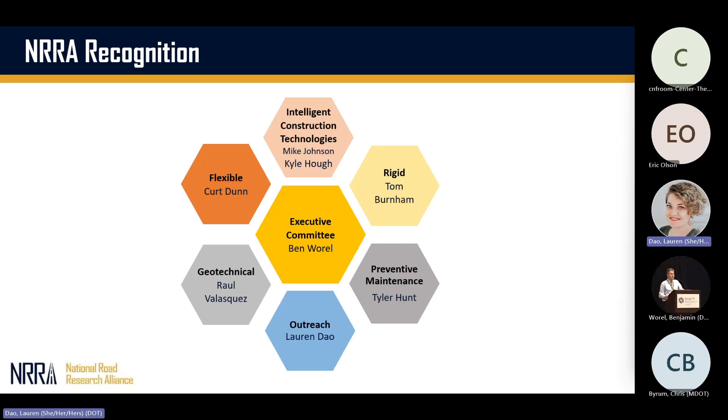With that, I'd like to transition to the 2026 Jerry Rohrbach Award. Jerry was a prominent figure at MnDOT who held a number of positions, including Director of the MnDOT Office of Materials and Road Research, Pavement Design, and others. He was influential both professionally and personally with those he came in contact with, including many in this room.

John Garrity was voted on by his peers, and there's a lot of information in your conference handout that goes into detail about John. I'm not going to go through all that, I'm going to try and hit on a few highlights.

John really helped make bituminous what it is today in Minnesota. He's guided the state DOT through a number of important changes, including the implementation of SuperPave, bituminous ride specifications, the quality management or QC/QA process we now use, and many other changes. John is a trusted and recognized expert both within MnDOT and the broader asphalt community. Not only is he a talented engineer, those who know him say he brings a lot of humor into the workplace. John is also a personal friend of mine who's helped guide and shape me, and many others in the department. So John, if you could please come up to accept your award.

Okay, thanks Mark, and good morning everybody. First of all, I'd like to thank everyone for voting this year. I'm humbled and honored and very happy to be a Jerry Rohrbach recipient. I actually had the opportunity to work for Jerry when he was both pavement design engineer and director of the building, the Maplewood Lab, where I currently work. Jerry gave me one piece of advice that I try to follow throughout my career: do the best you can and have a lot of fun. That's what I've been trying to do for the last 37 years. So thank you again, I'm honored for the award.

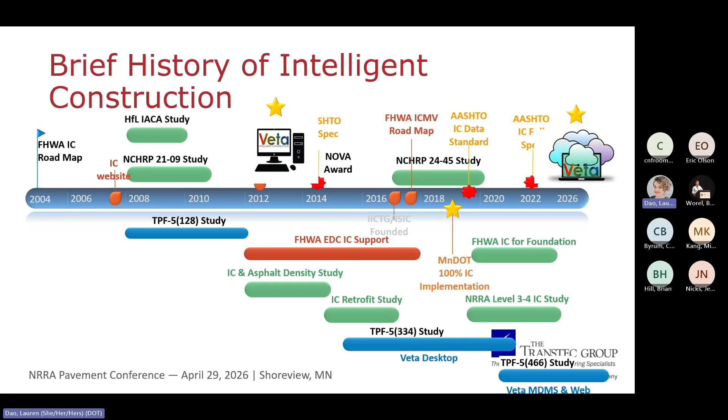So the journey started with intelligent compaction, later evolving to jointly leverage other intelligent construction technology, such as PMTP, paver mounted thermal profiling, to detect potential thermal segregation behind the screed or paver, and DPS, the dielectric profiling system, which was taken on by another pool fund study.

Later on, Minda, or Rebecca, led the development of the AASHTO standard MDMS, material delivery management system, which expanded e-ticketing to the whole nine yards - from loading and delivery events, to the entire agency acceptance on all that. So that closes the loop for the entire construction workflow, from where the material is produced, delivered, dumped, paved, compacted, and accepted.

So those technologies - IC, PMTP, DPS, and MDMS - all comply with the AASHTO standard, which helps not only Minnesota lead the nation in implementing these technologies, but also helps all other 49 states implement it by following the national standard. So that's the journey and what the principal vision is all about.

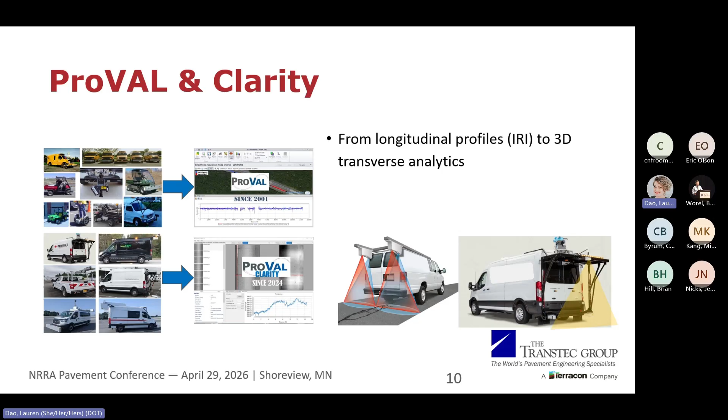This so-called Clarity is another software to standardize 3D surface data, which also follows AASHTO standard, to enable all 50 states to implement any 3D technology in a standardized way, and also to perform quality assurance by viewing and validating the data. So that's the purpose of Clarity.

Here's the brief history of pavement profiling, tracing all the way back to the 1950s when we started with the rolling straight edge, then later a response system for measuring pavement smoothness, and later the so-called inertial profiling system, which is the high-speed version used today. Since 2000-2010, the technology started to evolve into 3D surface measurement, and eventually this technology may all converge.

ProVAL, in this case, emerged in 2000, and was supported and sponsored by a pooled fund study, which I'm going to talk about tonight at the RPUG conference. So that's a 26-year journey to help the nation and all 50 states standardize profile viewing, analysis, and reporting, and implement the IRI standard-based standard, the International Roughness Index standard, by converting from the old profilograph index base to the IRI.

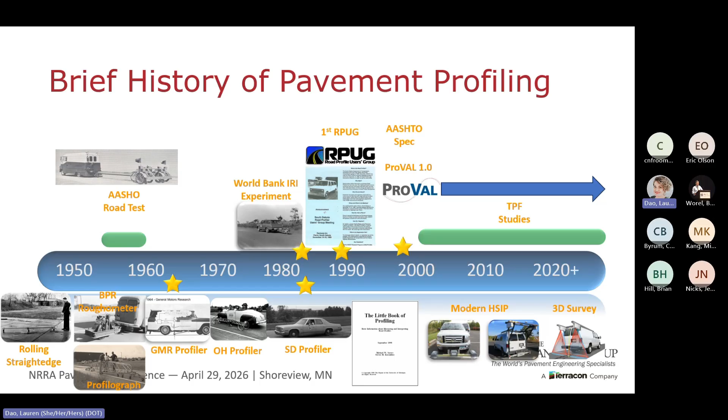So the nation can have a standardized way to evaluate smoothness and report it to the Federal Highway HPMS system with a standard and robust reporting system. This ProVAL platform, as I said, is a standard platform for any profiling system to import data into. So it can do this - it's a global tool.

It's R56. That's what we're going to talk about a lot at the RPUG conference in the next few days in Pittsburgh, Pennsylvania - to ensure all profiling systems and their operators are properly certified before they can collect reliable, robust, and correct data for pavement construction acceptance. So that's what our AASHTO R56 certification is all about.

R56 has now evolved to our so-called stop-and-go and low speed profiling system that can reliably collect smoothness data, even on low speed sections of highway, city areas, or any places that may have stop and go due to traffic lights or railroad crossings.

Those are the ones that have been evolving from federal highway research, and again the Veta and ProVAL software has been free because it's been standardized and sponsored by the pool fund study, always complying with the AASHTO standard. So it's not only for standardization for construction acceptance, but also for state DOTs' quality assurance for any state that allows contractors to collect pavement smoothness data.

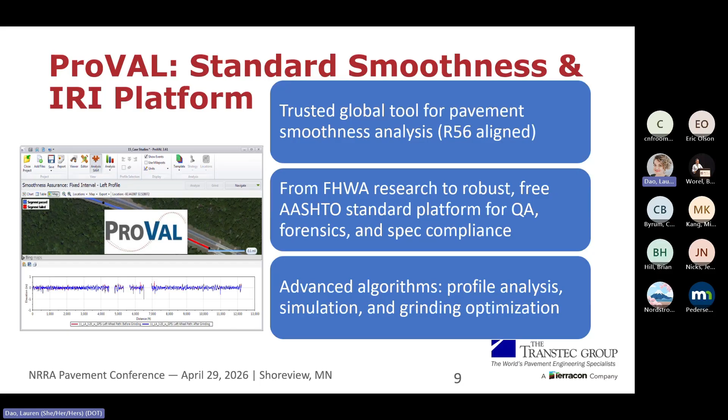Like I said, everything I've been doing over my career complies with the AASHTO standard and also the ASTM standard. I'm involved in the ASTM E17 committee to standardize as much as possible for pavement smoothness and data format, as well as weigh-in-motion, faulting, and certification modules - those are kind of a mirror and counterpart of the AASHTO standard.

I've been working very closely with AASHTO as well as the ASTM standard to make sure they're all compatible and in line with each other. So for those who don't know, AASHTO standards serve all 50 states, while ASTM, called ASTM International Standard, serves not only the US but also the rest of the world.

So we're serving and helping the world implement those technologies also. I started with 2D pavement smoothness in year 2000.

In the past decade, the technology has evolved to using a 3D LiDAR system to scan the entire pavement surface to gather the correct current pavement surface data and use those high quality data. These data are not simply color or images; they include intensity data, which shows the surface like a black and white photo, as well as elevation data. Combining these two is the current high-speed 2D, 3D surface data being collected by those technologies, notably pathway or pavement systems around the country.

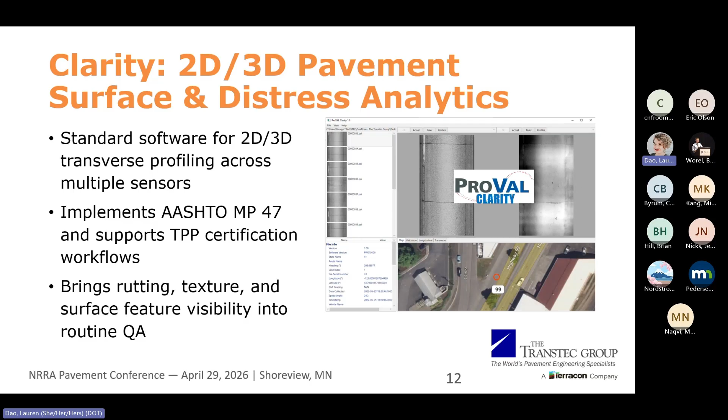Just like the similar need to standardize pavement smoothness, now the clarity software, a pool fund study that the districts pool fund helped us develop, standardizes such a tool so it can be viewed and analyzed, making it easier for DOTs to implement around the country. This can validate the data and also bring in rutting, surface, and cracking standards in the future. Currently it only does rutting, but in the future it can be used by DOTs to verify contractors' data collection for rutting and cracking.

So switching to ISIC. People always ask, what is ISIC? It's the International Society for Intelligent Construction. This has been thought for years, but in 2016, one of the co-founders, Dr. Soheil Nazarian, and I co-founded it. Now we have 500 something members, and we conduct a conference every two years, along with a lot of workshops and webinars.

This International Society for Intelligent Construction creates a global platform for all experts, producers, and users of intelligent construction technology to share experience, technology, hurdles, and solutions for any subdomain technologies such as sensing technology, data analysis including data standardization, decision making, and highway asset cycles.

We've also produced and written, busy writing over weekends and nighttime, a lot of textbooks for university or agency training programs to train the current generation and future workforce to handle and manage intelligent construction technology.

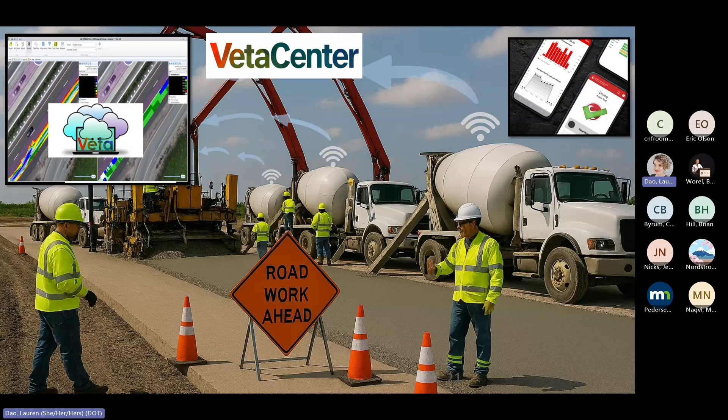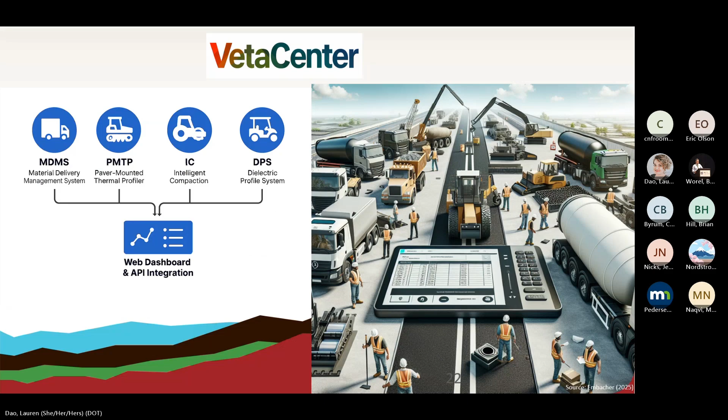So those are the standards we're going to do, and here's the VetaCenter that will include everything, merging and fusing all the data together from the entire paving train. The desktop version, in several months, will all be on the web. That's the full module I mentioned about.

Hope y'all can attend our ISIC North American Conference in Louisville from August 24 to 26, so we can talk more about intelligent construction technology. So this is my brief journey of 30 years of smoothness and intelligent construction. Thank you so much.

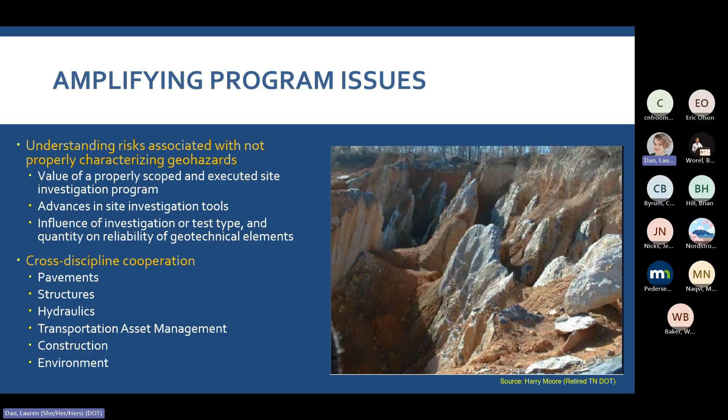So when everything is said and done, for the last several years we've had 5 major pots where we have been sort of assigning money for research purposes, for development purposes. Innovations in geotechnical design and construction methods is just that - it is the evolution of construction means and methods and the size of elements, and our ability to try and govern all of these new construction means and methods and innovative construction means and methods.

Advanced site characterization points back to that whole geohazard issue, and doing a better and more reliable job of understanding the input parameters to design, so that we can do a better job of delivering projects.

Asset management and performance management - that really looks at our ability to understand long-term in-service performance of geotechnical assets, including pavement subgrades, which is nearly impossible because you can't see them or touch them. So how do we know, for instance, if we are doing something below ground and then covering up with pavement for 75 years, how we're getting performance out of that long term? We really don't. We're looking for ways to try and better understand that.

Geotechnics of scour - Jennifer Nicks has been working on some really impressive work lately, looking at scour and clays. We are trying to get some stuff published. I'll talk about a couple slides, but it's very, very impressive work.

And then finally, our geotechnical aspects of pavements - understanding that pavements are our single largest asset in a DOT, and the fact that we really have been disconnected as a geotechnical program from our pavements program. We have been working with the pavements group and some external partners to see if we can't do a better job of integrating with our pavements group, to look at such things as permanent foundations under pavements as a concept.

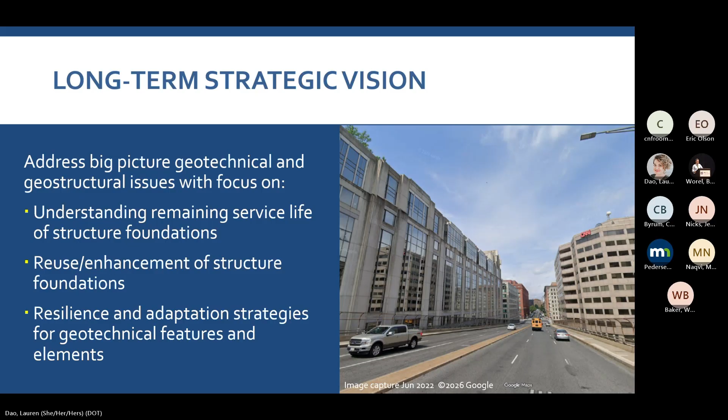So, I'll start with a couple of things that we are currently working on, with that as sort of the background.

One of the first things we are working on actually started about 15 years ago, when we started to write an update to our GEC 5 document, Geotechnical Engineering Circular 5, on soil and rock properties. We ended up titling the new document Site Characterization. The idea was pretty simple: if we look at geotechnical design across the board, we generally accept the fact that we are going to have changes in just about everything except soil and rock properties.

But a code doesn't really acknowledge that. A code just gives you a minimum standard of care—do a boring here, take a couple samples, move on. And we don't really address uncertainty in the site characterization process very well.

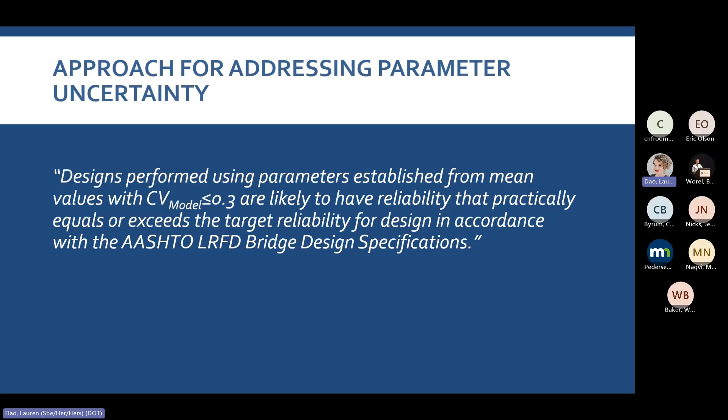Okay, so with that, the way the code is going to look in the future, hopefully if we can get this through Charlotte in June, is that instead of there being a Section 10.5 where we had all these resistance factors just sort of tucked into tables, we've now moved all of the resistance factors to match the design elements that you're working on. So if you go to 10.6, which is the shallow foundations design section, the resistance factors specific to shallow foundations are all going to be in 10.6 now, not there. And 10.7 will be driven piles, 10.8 will be drilled shafts, 10.9 will be micropiles.

The model will give you something called a critical design parameter, the parameter that is most sensitive to its effectiveness. So if you're looking at a drilled shaft side friction design, the critical design parameter would be shear strength of the clay. That would be the parameter we are looking at the coefficient of variation for. This does not absolve you from being diligent about all of the other parameters, it just looks at the critical design parameter.

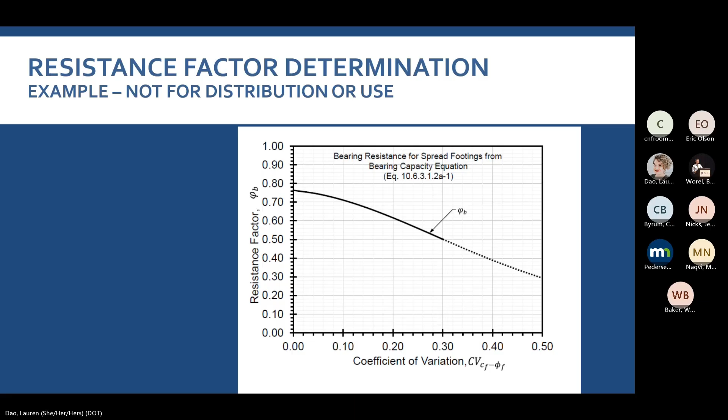The second big picture item we are getting involved in hasn't started yet. It should have started in January. We are still waiting on some final pieces of paperwork to start. But we have been given an opportunity by Texas A&M University to go down and deconstruct one of their national geotechnical experimentation sites. So let me back up.

Back in the early 1980s, the Federal Highway Administration partnered with the National Science Foundation to fund a series of characterized outdoor laboratories around the country. We built six initially as Tier 1 facilities, meaning they were extremely well characterized. The idea was that once the labs were built and developed, we could allow geotechnical contractors, engineers, and researchers to go out and use the sites for experimentation of any kind. The most famous one was Treasure Island out in San Francisco, it no longer exists, it was taken out and now there are condos on it. But we had Tier 1 sites at Texas A&M, the University of Massachusetts, and Northwestern University. I think the one at Auburn University still exists.

But they are getting ready to do some construction on one of the sites at Texas A&M, and they called us up and asked if we would be interested in coming down and helping them decommission the site. To us, decommissioning meant a lot. It meant that for a site that was initially characterized back in the mid to late 80s, in the 84 to 88 range...

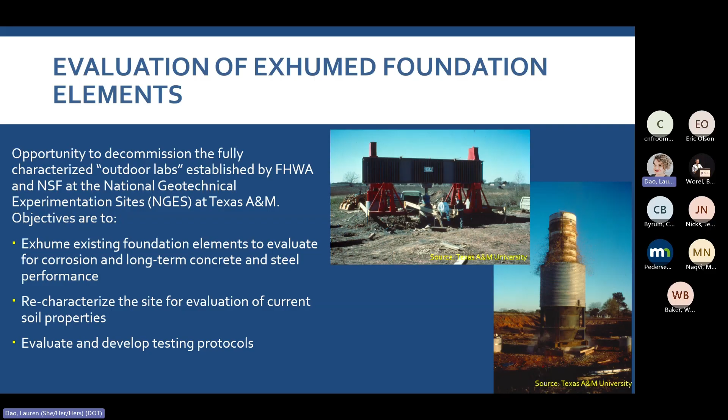We have a long-standing project that's been going on for several years, looking at the evaluation of geotechnical limit states for structural foundations. The idea is that as elements get bigger, they become harder to design and understand. We work in a big strain, load deformation arena—you put load on it, it deforms, and we pick some arbitrary location and call that nominal resistance. In a 12-inch diameter element, that's fine, but in a 12-foot diameter element, that's a lot of movement that can't be tolerated, which gets us back to whether geotechnical strength limit state belongs to the geotechnical engineers or not. We're still looking at a lot of different things there, but I think so far we're understanding a lot more than I thought we would.

We are looking at quality assurance procedures for large diameter drilled shafts. The evolution of rotators and oscillators has made it impossible for us to understand some things—I want to point out that's three pieces of technology that have interrupted this presentation already. Rotators and oscillators have made our understanding of quality assurance and acceptance in drilled shafts very, very difficult of late, so we're looking at some changes there.

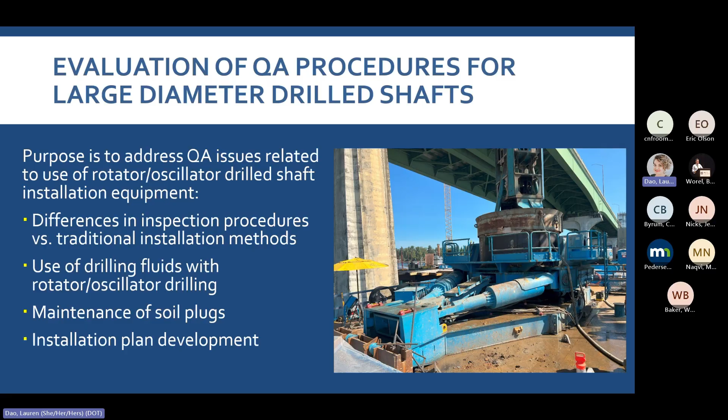I mentioned Jennifer Nicks earlier. She's working on some approaches for looking at allowable critical shear stress in clays. That essentially looks at part of our research strategy for NextScour, which is a better understanding of the geotechnical aspects of scour. She's doing some really interesting and impressive work there. We have some papers in draft, so state DOT people who want an advance copy, just call us and tell us you want to review it and we'll send you a copy. Jennifer's listening, and I hope it's okay with her.

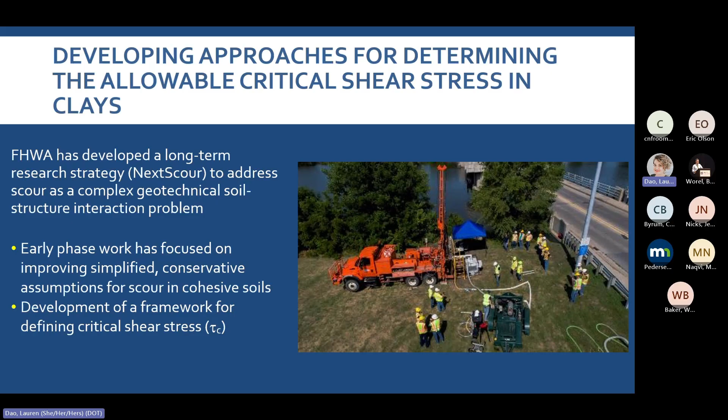We have a broad agency announcement, a big research effort in liquefaction hazard assessment going on right now, with the UCLA Next Generation Liquefaction Group. We're working with them on models that we hope will improve understanding of liquefaction triggering, liquefaction susceptibility, and liquefaction manifestation—which is something I don't quite understand, but they tell me that even if it doesn't manifest, you can still tell it liquefied. Fine. We'll see how that goes in the future, but we're a few tests into that.

There are just a few additional activities going on. I won't go into real detail, but we've got some external projects, including one Tom Yu is working on, a demonstration project for long life pavement foundation systems. That's a pooled fund that's just getting underway, so find him at lunch and pick his brain about what's going on with that.

We've also got some contract former postdoc employees at Turner Fairbank working on roughness measurement devices for gravel roads—think IRI pavements, but for gravel roads. It's called the RTK GPS cart, a testing device mounted on a golf cart. So a bunch of things like that are going on, and some other things we've got on a wish list to look at in the near future.

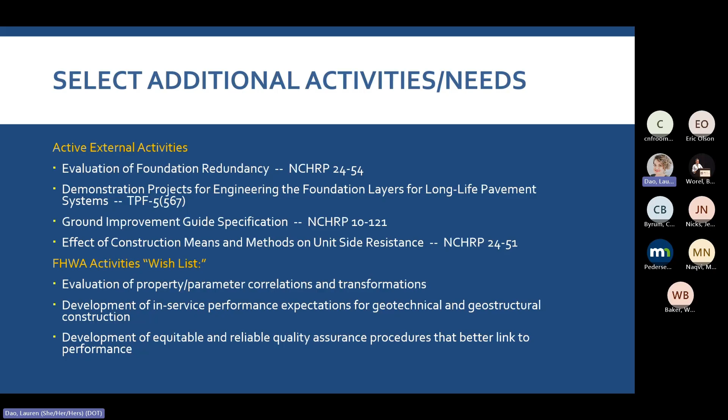The last thing I'll mention is that we're going to be doing a lot more work through NHI for communication. We're going to continue to develop, assess, write, and document, but we won't have the resources to really run around the country and do the things we used to do before, which means we'll have to find different ways to communicate with state DOTs and our partners. So you'll start to see a lot more work through NHI to help us communicate results and developments we're doing both in-house and overseeing externally.

And I hope that in the near future that will find its way to be practical and efficient for the way that states continue to deliver projects. So with that, I'll say thank you.

That's the I-95 bridge in Philadelphia that burned down a couple of years ago, which we rebuilt geotechnically until they could come in with a structural solution. We were able to get the bridge back open in 3 weeks by using foam glass aggregate fills that ran 24 hours a day through all kinds of weather until we got it paved, put a wall facing on it, and reopened it to traffic. Then 6 or 8 weeks later, they finally started getting pieces in for the bridge, and they rebuilt the bridges around it. So, thank you.

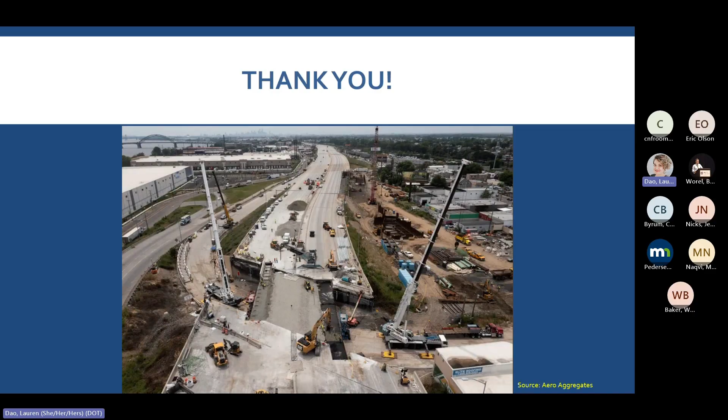So, Professor Ali from Auburn graciously came to present this. Sorry, you're only going to have 15 minutes, hopefully you can get to the point and deliver the main topics. Their students drove 20 hours from Auburn to bring these sensors that we're going to be installing across Minnesota to test this technology. So anyway, I'm going to stop talking, let Ali talk about the technology, and hopefully you guys get excited about InSAR. That's fine, I'm going to actually go walk.

Hi everyone, thank you so much for having me and my students. We came here to present a topic, as Raul mentioned, on the use of satellite imaging and InSAR to measure ground deformation, mainly for geotechnical asset management. I'm here with my students - I flew for 2 hours 30 minutes to get here, my students drove for 20 hours, so we all know the suffering they had before, right? So there's professors.

This is the team involved in this research. It's a collaborative work between Auburn University and Texas A&M University. We have me, Dr. Kupala, and then Dr. Montgomery. We also have a collaborator in the UK, University of Exeter, Dr. Matsuri, with background in InSAR and remote sensing. I also have my students with me today, Najib, Zahra, and Vadova - they are the brain and muscle behind this work. They're going to have some posters today, so in case you have any follow-up questions regarding this topic, reach out to them and ask questions.

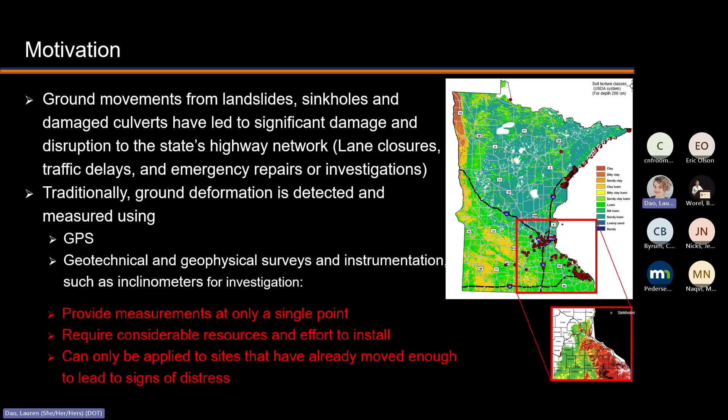Traditionally, monitoring these types of deformations is done through surveying, instrumentation, and similar technologies, which provide very good, accurate data. However, they come with limitations. First of all, they provide measurements at very focused locations. They are time consuming, the installations need a lot of manpower, and require considerable resources and effort. The main issue is that you can use them only in locations that have already shown some sort of damage or distress. Here we propose an alternative approach.

That's the use of satellite imaging, especially interferometric synthetic aperture radar, known as InSAR, that provides better spatial coverage, almost global scale, and also has very short revisit periods. This means it will provide us near continuous monitoring of geotechnical assets.

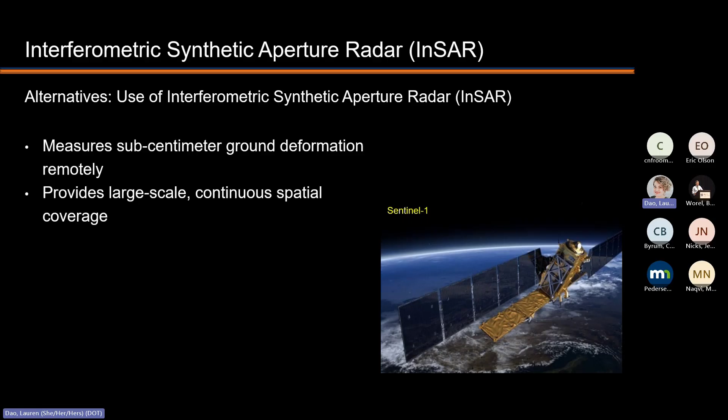But exactly how this InSAR technique works - here you can see a constellation of two satellites, mainly for one of the systems known as Sentinel-1. We have two satellites orbiting the ground along near-polar orbits, and each satellite has a 12-day revisit period, with two satellites bringing it down to 6 days. It means every location on Earth is going to be visited by the satellite every 6 days. If you think about it, that's very short, so this provides us with near continuous monitoring of the deformation.

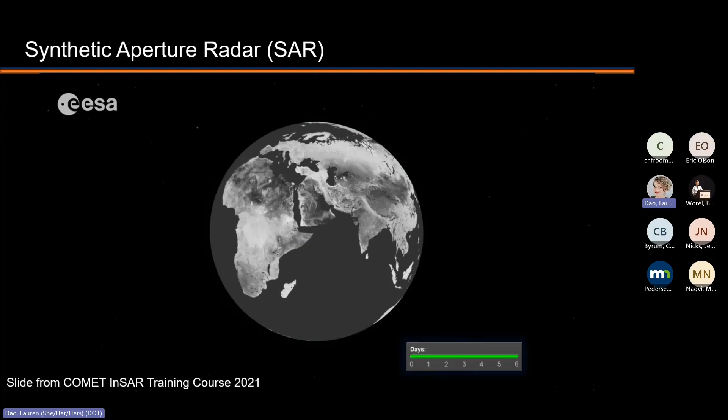There's always some confusion about what SAR and InSAR are. While these satellites were reading the Earth, they take images, reading south to north, but looking sideways. The image we get from these satellites is what we call a SAR image. It's 1D, and it usually happens along the direction of the look of the satellite. That's what we call LOS, or line of sight.

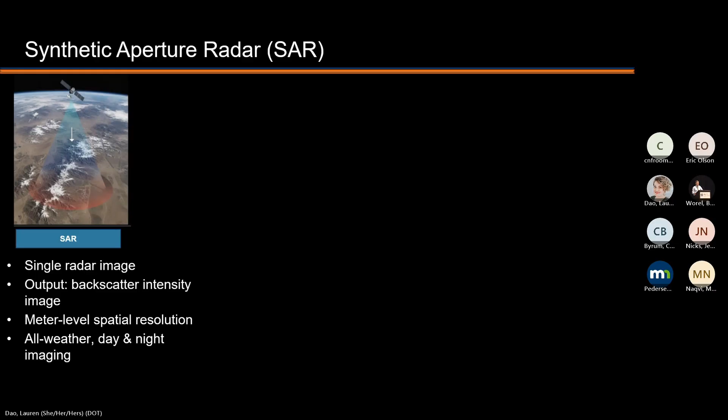These images at the beginning look like a normal image, but it's more complicated than that, providing you more information. It's like a complex number. It has two parts: a real part, which we call amplitude, and an imaginary part, which we call phase. Amplitude is pretty much like a normal image or aerial photograph that you see.

But phase is like some random pixels with different colors. Each color, when brightest, means better quality; when it's faded, it's low quality. When we go to the wavelength domain, amplitude is pretty much the length, the height of the wave. Phase is almost where we are in this wavelength, and the value changes from 0 to 2 pi.

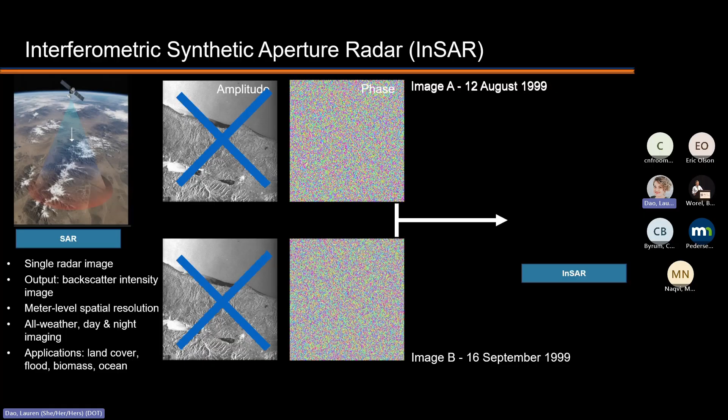Imagine we have image A from some period of time, and image B taken some days after - say 35 to 36 days after the first image. If we ignore amplitude and just focus on phase, we can subtract the phase from image A and image B and come up with a new image that we call an interferogram. That interferogram is what provides us with the deformation pattern in the region.

This process - taking images, getting to the interferogram - is what we call interferometric SAR, or InSAR. So that's the difference: in general, when we talk about SAR, it's mainly the image, the data we get. When we talk about InSAR, it's the process, the technology, the technique that gets us to the interferogram.

This cartoon shows the whole process in a simpler way. Imagine we have these satellites. They have SAR sensors, which are pretty much like microwave sensors. They send waves to the ground and receive the backscatter.

With that, we know the length of the wave, but how many of these waves we have, we don't know, because the distance is long but we still need many of them. It's like having a ruler that has multiple ticks - we know what the distance is, but we don't know how many of them we have.

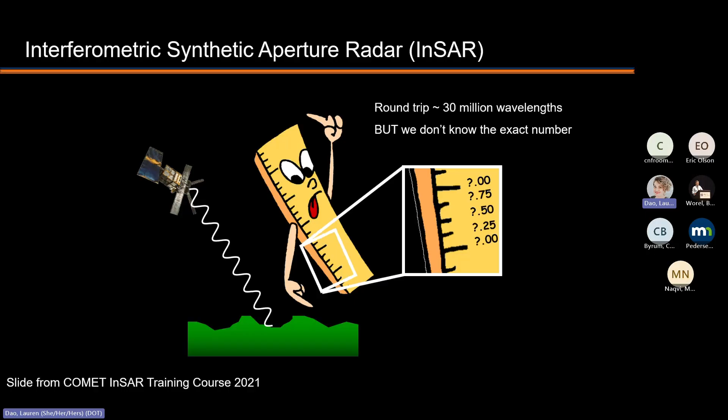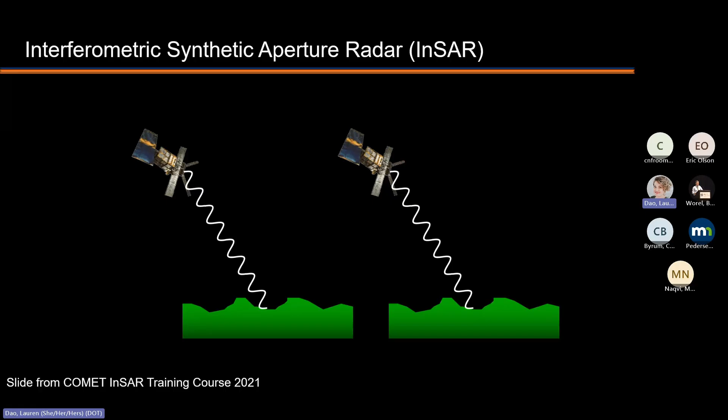Think about this satellite taking one wave at a certain time, then coming back later and taking another wave, getting some scattered data from that wave. We start comparing these two wavelengths together. If the satellite visit shows no difference in the wavelengths from the first and second image, it means the ground hasn't moved at all. But if you see a difference, that difference results from some sort of deformation in the ground. So it's pretty much like that.

We have it due to topography, due to atmospheric effects, and then we have some noise in the region. So at the end, we have the phase difference due to deformation.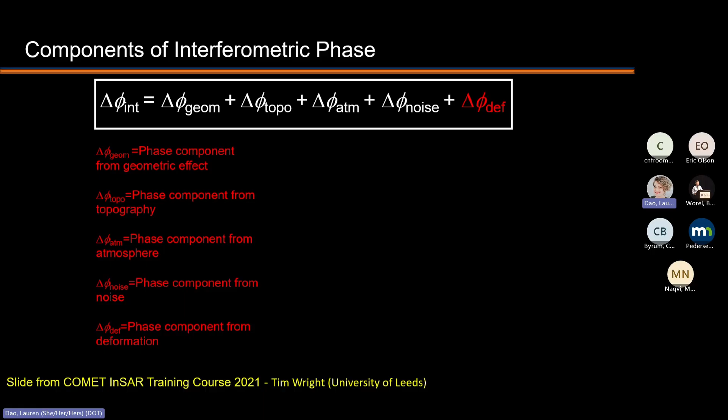When we have these satellites, they usually look at the Earth from 2 different angles. As I said, they usually move south to north. But the satellite, for example for Sentinel-1, when it goes from south to north, we call that an ascending path. And when it does that, the look of the satellite - the LOS, let's call it - is going to be toward east.

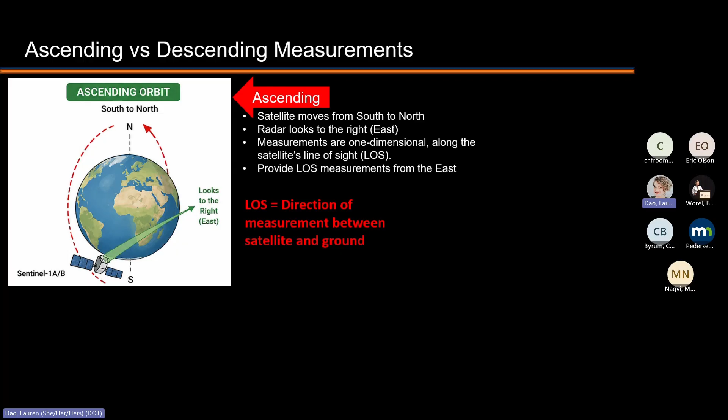When it goes from north to south, it's what we call descending. During this pass, LOS is going to be toward west. So overall we have 2 measurements. They are not horizontal, not vertical - they are along the look of the satellite, or LOS. From this image, you can see one for ascending, one for descending. With these two, some simple math gives us what we need: vertical and horizontal deformations.

There are different types of SAR satellites that you can use, and they come with different frequency ranges. We have mainly X-band, C-band, and L-band, and the difference is in the wavelengths they send. X-band has the shortest wavelengths.

X-band senses small objects, but is highly affected by vegetation, as you can see in the figure. As we go to L-band, it has the longest wavelengths, and the penetration depth is very good - it passes through vegetation with minimum effect. Then we have C-band, which is in between, providing a good measurement but still affected by some vegetation.

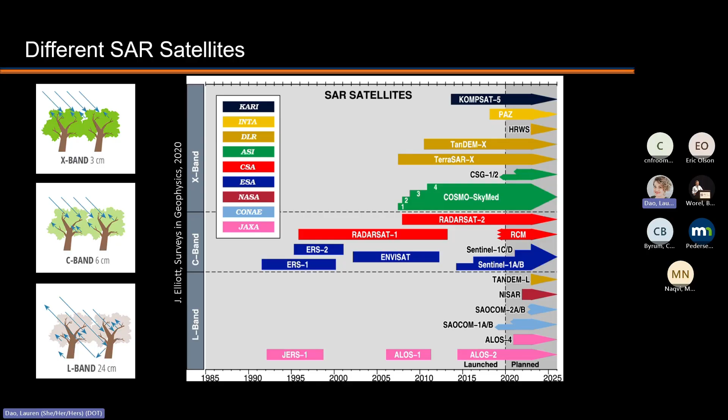Like Sentinel-1 or NISAR. When you have higher resolution satellites, it provides more spatial details, but you sacrifice spatial coverage. With lower resolution, you get better spatial coverage but sacrifice spatial details. So it's a trade-off between spatial coverage versus reliability, and depending on the project or application, you decide which one to go with.

The other important factor for us is how to access the data - whether it's free or commercially available. Commercially, they're very expensive; each image can cost a couple thousand dollars, depending on the satellite used.

Our focus in this study was on free access satellites. Mainly at the beginning, Sentinel-1, because it was the only satellite available in that category. They are C-band satellites with a 12-day revisit period. There are always at least 2 satellites of this type orbiting the Earth, so that gives us almost 6 days revisit time.

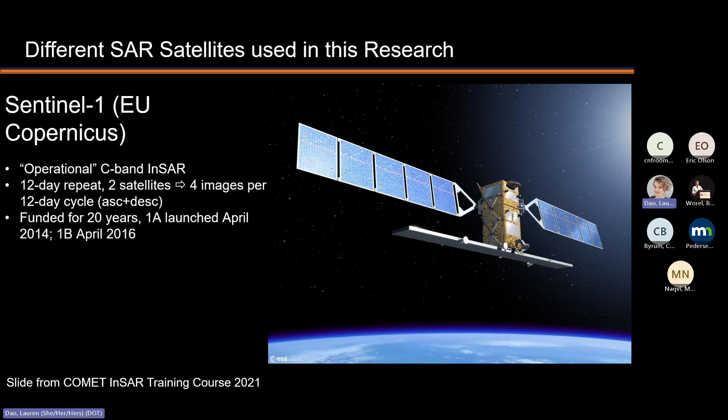Then the resolution comes, with different options - they have native resolution all the way to high or lower resolution depending on the application. We have NISAR, recently launched. It was supposed to launch 3 years ago, but for some reason they delayed it. Finally this summer they launched it.

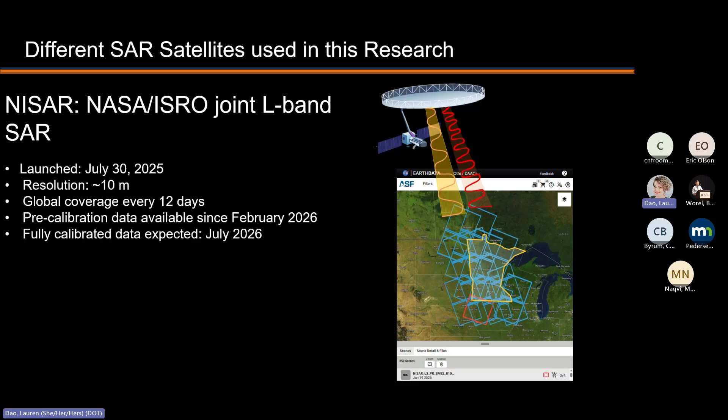NISAR has L-band, which is great for vegetated areas. It has a revisit period of about 12 to 14 days, and the resolution is about 10 meters, which is going to be great for projects related to geotechnical asset management. We were also able to secure access to ALOS data through a proposal submitted to JAXA,

the Japanese satellite system. They usually have this cycle every 5 years, in case you want to go - I think the next cycle is going to be in 2 to 3 years. They provide about 200 images. That's not enough to do continuous monitoring, but it provides us with tools for calibration and validation.

For Sentinel-1, it was the primary satellite for us for analysis. As I said, there are different types of resolution depending on what you're going to do - you can choose any of these. We have native resolution, which for each pixel is about 14 by 2 meters. We have resample, used for larger areas, since those pixels can be very small and a bit noisy. When we resample, we use more of those smaller pixels combined into one, improving the coverage.

And then finally, you can also do multi-looking, which is pretty much like averaging over multiple of these pixels. With that, you can improve accuracy for your measurements. You can see how the size of these pixels compares to the highways, for one of the highways that we did for our study.

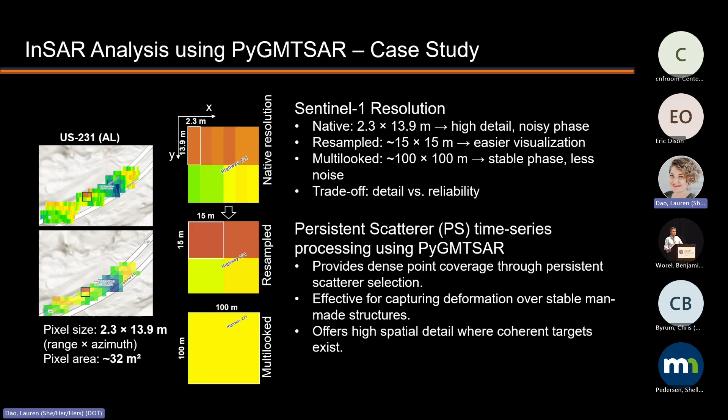There are different online or offline platforms that you can use for InSAR analysis. The one we used was a platform called PyGMTSAR, that uses PS, persistent scatterer time series analysis. I'm not going to go into detail with this one, but depending on the type you use, you're going to get different answers, different time series. So just be careful about your choice of framework or processing system for your analysis.

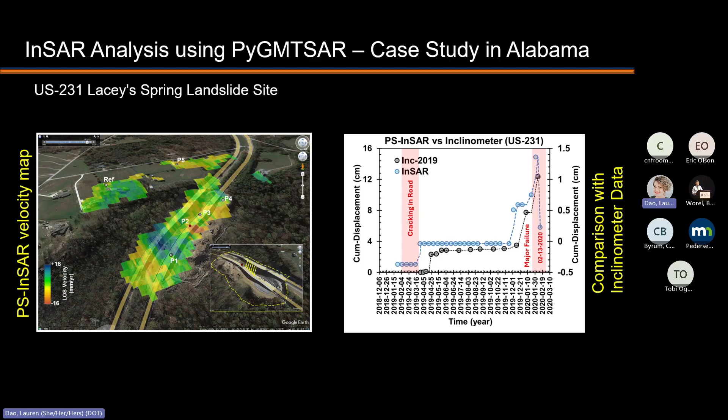We also did this for an area in Minnesota, Climax, due to some historic deformation that happened in the region. This is still preliminary data. We chose 3 locations since we had data for it: south lower, south upper, and north. This is the time series analysis we performed from 2017 to 2025.

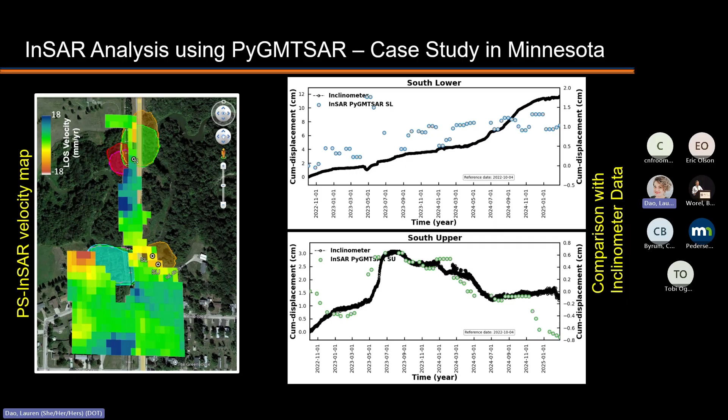Here you can see how InSAR compares with the inclinometer data in the field, this is for south lower, this is for south upper. For south lower, we were able to capture the trend, and for south upper, we were able to capture the exact trend, so this one came out better than the other. For the upper part, you can see some sort of seasonality in the measurement, which I assume needs more retuning to make sure we have proper values. But still, pattern-wise, we were able to capture the pattern observed at the site.

It still needs work because we cannot control the technology. There are many satellites already there, and new satellites going up that will improve this technology. At this point, it's like we are in robotic technology 10 years ago, when we only had hands moving like ping pong balls around. But now you saw what happened in the Chinese New Year festival, robotics doing the Jackie Chan thing at the festival.

And then, especially when you use Sentinel-1, we have some limitations because of the vegetation in certain areas, especially Minnesota and Alabama. There is huge dense vegetation, and that makes signal clarity a little bit difficult.

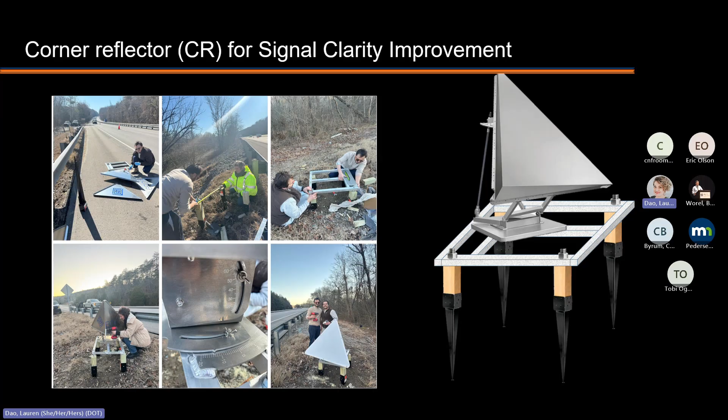How it works: imagine this is a satellite and this is the corner reflector. You just have to make sure these two look at each other properly. It's like love at first sight. When they have that, they make the connection easily and give you a proper image that can stand for a lifetime.

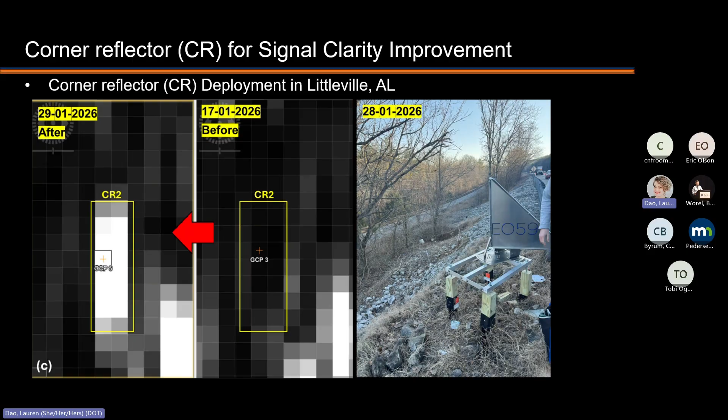Similar to many relationships. And then I would like to thank you all for having me.

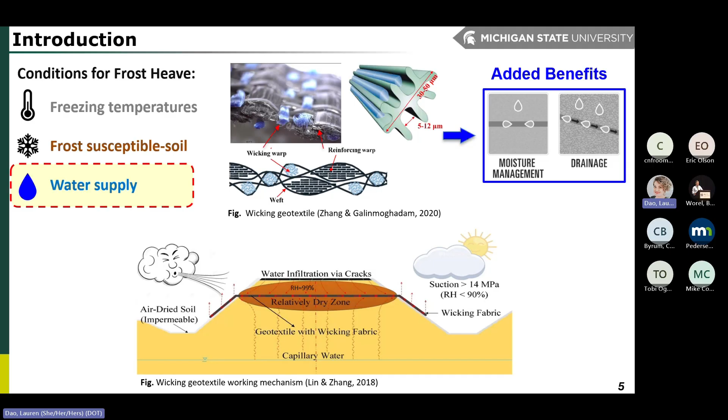It has standard properties of geotextiles, but it also adds some benefits like moisture management and drainage. These wicking warps draw water into the fabric and then pull it out toward the shoulder, providing moisture management, uniform distribution, and better efficiency in drainage.

So here's the goal. Today I'm just talking about the field part of this project. My colleagues already conducted multiple large-scale tests in our laboratories in Michigan State University, Texas A&M, and INGEOS.

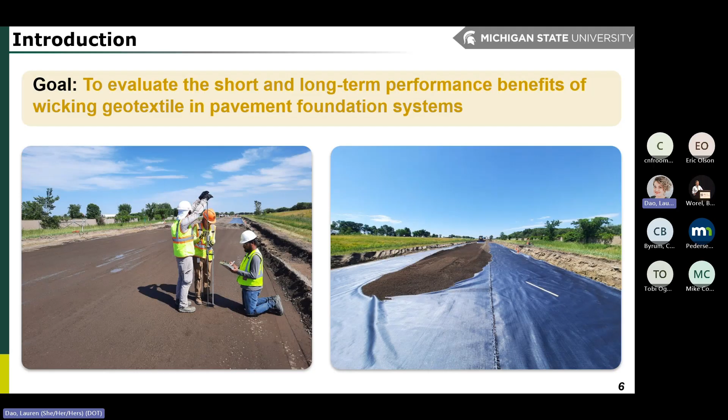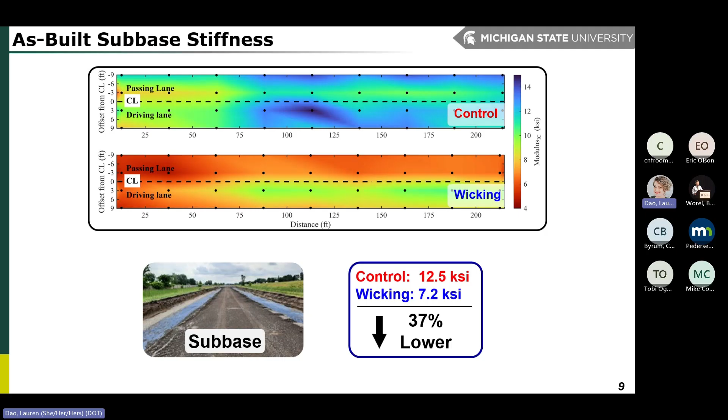After compaction, we had 37% lower stiffness in the wicking geotextile section because of some schedule constraints during construction, so we had to place the other layers on top of it. This is the intelligent compaction result for sub-base, with a similar trend for base showing 23% lower stiffness.

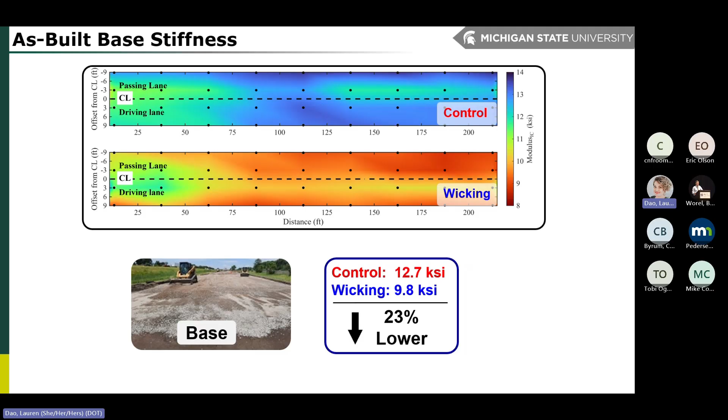So the wicking geotextile section started with lower stiffness, a disadvantage at day one, but it also gave us a chance to see the performance of this wicking geotextile under unfavorable conditions, which was a great thing for us at the end of the day.

When it comes to the monitoring results, I'd like to talk about moisture content first. I will share just two different moisture sensor results for today. The first one is from subgrade at 33 inches depth, which is 3 inches below the geotextile. This red line is for control and the blue one is for wicking geotextile.

I think everything is so clear here, the difference is super clear. During spring thaw, right after that blue-shaded freezing season, the increase in moisture in the control section is significantly higher than in the wicking geotextile section. It was drier, but at the same time it provided uniform moisture distribution throughout the section, which is really good.

There are multiple studies out there, but studies show that just a 2% increase in moisture can significantly increase permanent deformation or decrease the MR resilient modulus. So this is really critical for us.

This one is the sub-base sensor. The difference is not that significant in terms of the amplitude of the moisture content, but if you check the spikes after each rainfall, you see on this side of the slide that the control section had significant fluctuations after each rainfall, while the wicking geotextile provided uniform moisture and was even drier in some periods at the sub-base.

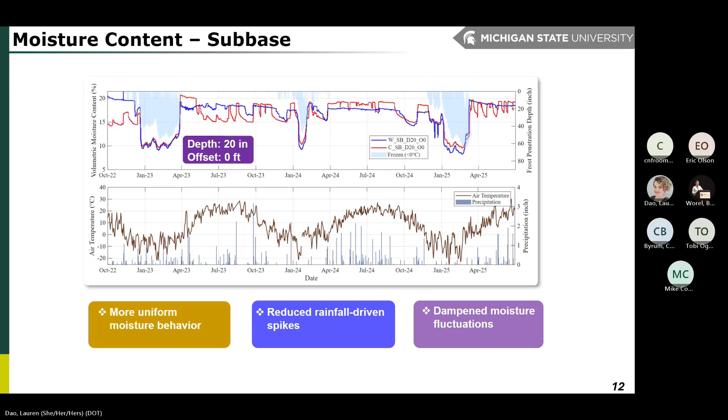So this is above the geotextile, by the way. And just one example from the displacement profile from the inner wheel path of the passing lane. This is our shape array sensor.

In this project, and actually in different projects, we're still working to understand the shape array sensors, but the existing interpretation is that we think we have frost-induced settlement because of the surcharge pressure and flexure restraint coming from the top thick pavement. So we had higher settlement in the control section near the centerline of the road.

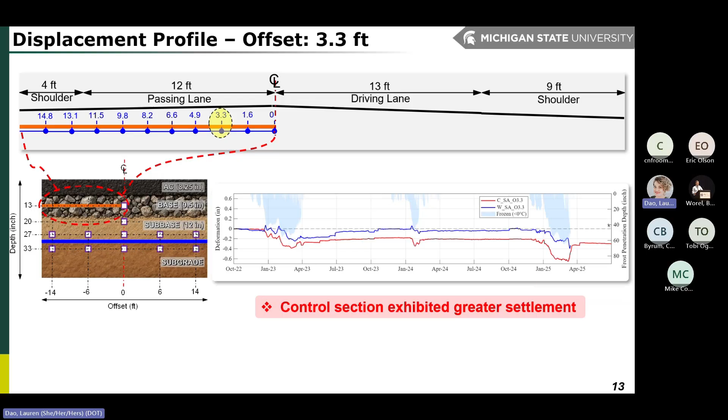And Wicking Geotextile was almost stable compared to the control section, especially in 2024 with milder winter. In addition to these sensor results, thanks to the MnROAD team, especially Jacob, he conducted multiple FWD tests in different seasons and months to see the structural performance of these test cells and understand the performance of the geotextile. We did back calculation with these test results, but back calculation has some flaws and it doesn't allow us to

do apple-to-apple comparison. That's why we wanted to go with the deflection basin parameters recommended by FHWA 2017. The first index is the base layer index, which represents the performance of the base layer, depending on the depth of the layer. We have 14 different FWD test results throughout the project period.

First of all, it provided uniformity. The coefficient of variation of the Wicking Geotextile section was 32% lower than the control. The Wicking section also had a higher BLI, which is actually bad at the beginning of the project. But right now, if you check the last test results, they're almost identical. So if you check the long-term performance of the geotextile, they are converging to each other, which is good,

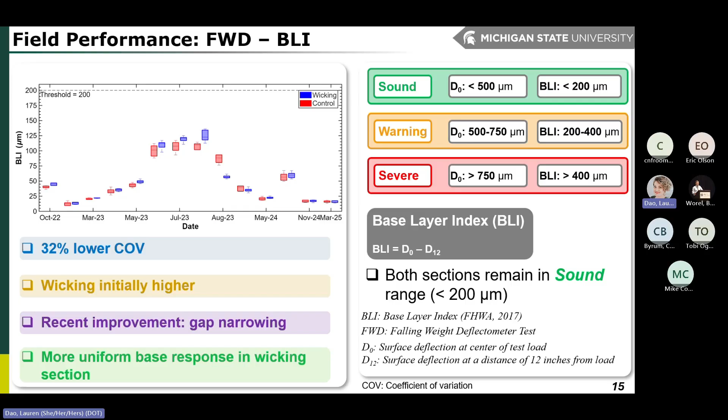but 3 years is still not what we'd identify as long-term. To see more significant benefit from the geotextile, we should observe and monitor these sites for more years. The second index is MLI, middle layer index, which represents the performance of the sub-base. The trend was similar here. The last one is the lower layer index for subgrade. The gap was narrower compared to the other ones, but we observed a similar trend.

So these are the conclusions. The first one is, as I mentioned, we initially had 12 to 45% lower stiffness across layers in the Wicking Geotextile section. But even with this disadvantage, we had effective drainage with a functional outlet.

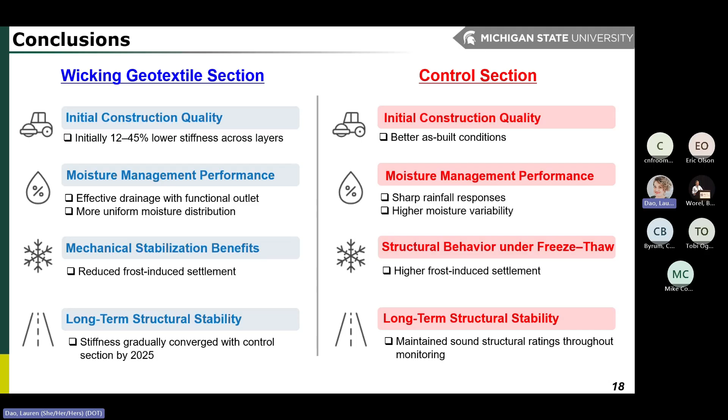I'll mention this functional outlet in the lessons learned section. We had more uniform moisture distribution, reduced frost-induced settlement, and stiffness gradually converged with the control section by 2025. But again, we should monitor these sites for more years to see more significant differences between these two sections. These are the lessons learned, three lessons learned here.

The first one is proper compaction, which is really critical for structural performance, but at the same time, for capillary continuity, we need proper compaction to have that contact between the soil and sub-base, or depending on the type of soil, and geotextile, which is really critical because if you don't have capillary continuity, unfortunately the geotextile doesn't work properly.

The second one is the functional outlet. Actually in the report it's clear, but I didn't have time to elaborate on this today. We observed some differences between the driving lane and passing lane. The pictures we had from the field showed that we had some problems with the drainage outlet at that site, which is why it didn't give us good results compared to the driving lane.

It's really critical. And the last one is quality construction and inspection at terminations. If we have a ditch design, even with the daylighting design, the main concept here is the suction gradient. That side of the geotextile, the termination, has to be drier than the inside. Otherwise, if you are on the wet side on the shoulder, unfortunately this ends up leaking water inside the system. So this is really critical.

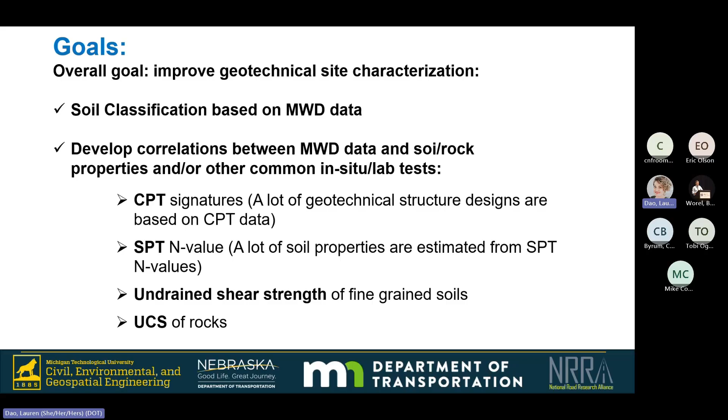After instrumentation, we collected a lot of data. We drilled 36 boreholes—26 using HSA, hollow stem auger drilling, and the other 10 using mud rotary. We collected the measurement-while-drilling data, did some in situ testing, collected samples, and ran lab tests. So now we wanted to see what we can do with this collected data.

These are the six parameters we collect for all types of drilling, with the last two only for mud rotary—these are individual parameters. Then there are equations, most physics-based but some partly empirical, that calculate properties from these individual parameters—these are compound parameters. So we have six individual parameters and many compound parameters; eight or nine of them are the most commonly used and beneficial, and we use these to develop correlations and also soil classification.

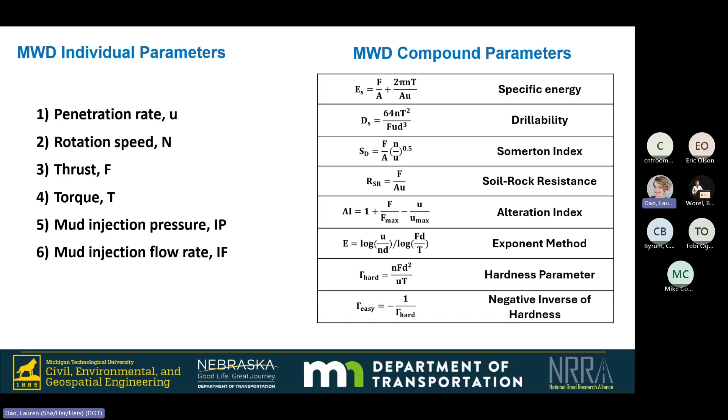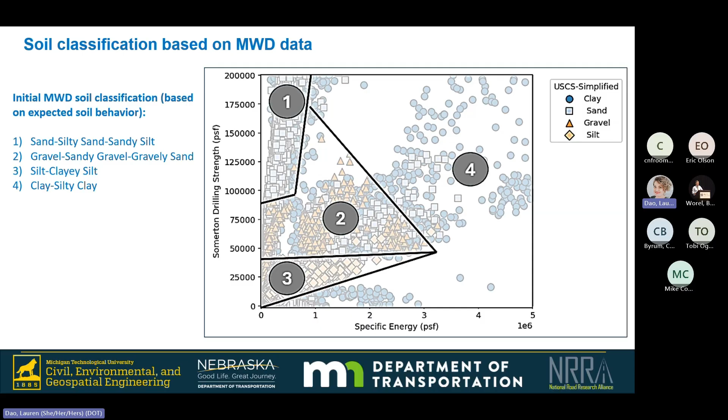Compare them, and they are in relatively good agreement. So I think it's not a final classification, but it shows that we can get somewhere with this data.

The next thing we wanted to do was compare CPT and measurement while drilling data. The first attempt was to just plot them on one plot, but the scales are so different that the measurement while drilling just becomes a line.

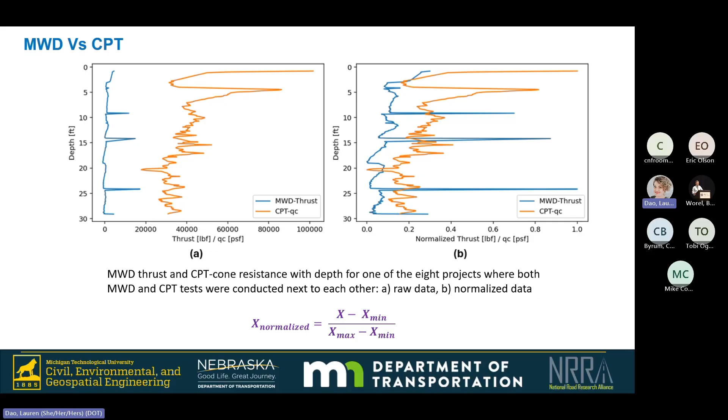We cannot compare them like that, so I normalized them based on this equation. Now we could actually compare at least the trends, to see if there's any correlation or any hope of correlation. Doing that, as you can see, there is actually really good correlation, so we should be able to predict one from the other.

So in this case, we're measuring the MWD data, and we want to predict the CPT. A lot of our data showed really nice, similar trends, which was encouraging. But then we came across some plots like this, where you can see it's all over the place.

We have 8 CPT data points with measurement while drilling right next to them, and all of those measurement while drilling runs were HSA. We realized during this project, for the first time, that there is a specific issue that occurs when you're drilling with HSA.

Sometimes when you're drilling in high plasticity clay - and it's not the traditional definition of high plasticity, if your liquid limit is above 30-ish and your plasticity index is above 15 to 20 - you'll see this phenomenon. Each one of these lines represents one flight of the auger.

At the beginning of the auger flight, the torque is normal and the thrust is normal, but as you go down with that single auger flight, the torque increases and the thrust goes down, sometimes even reaching a negative number. That tells us that something's wrong here.

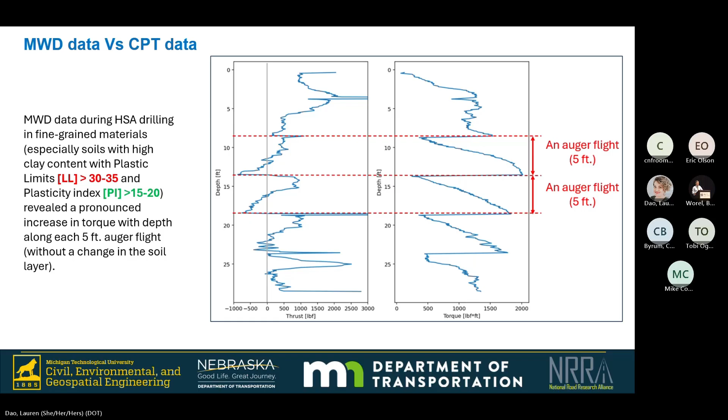So I wanted to see if we could still work with this data, because at least the first few inches of every auger flight should be fine. After that is when the auger becomes clogged and the issue happens.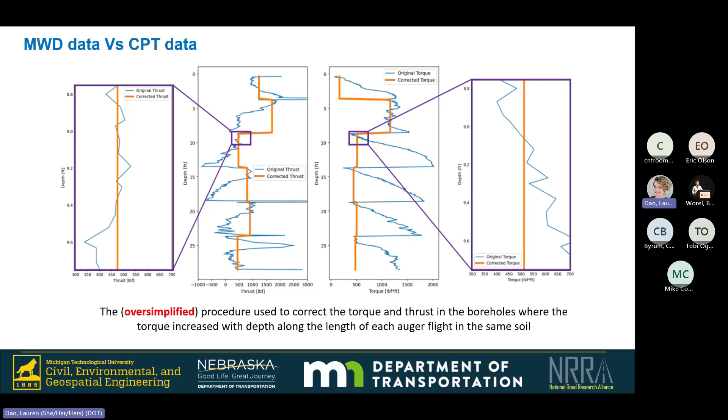So what I did was take the first half foot of each auger flight, take the average, and replace the whole section with just that average. It's not perfect - I just wanted to try this oversimplified method and see if I could find that same trend with it.

And it turns out that now, if I do that, I don't have the same problem I had before - the trends are matching a little bit better. Not perfectly, obviously, but it works pretty nicely.

But that's oversimplified, because when your torque goes up and thrust goes down, it's not just those two parameters you could fix - they're affecting everything else, the rotation speed, the penetration rate, everything.

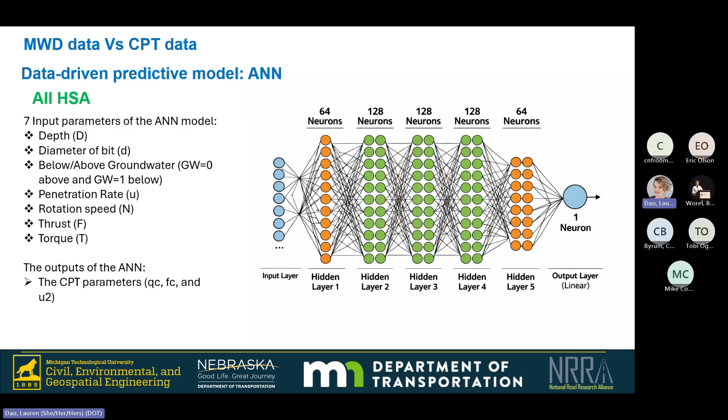So I wanted to see if I could use machine learning with all the information, plus some additional data - like whether I'm above or below the groundwater table - and see if I could get some meaningful results from this erroneous initial measurement while drilling data, so to speak.

And it turned out that I can. So I did this, then used some data that the developed model hadn't seen, tried to predict it, and then compared it to the actual data. As you can see, I could get some decent trends.

Then, with one of the boreholes we had not seen - we had the actual CPT for it - I plotted that against the CPT predicted by the machine learning model from the measurement while drilling data.

As you can see, they match very well. You obviously still have some issues - we cannot predict the negative pore pressure just yet, but we're working on that.

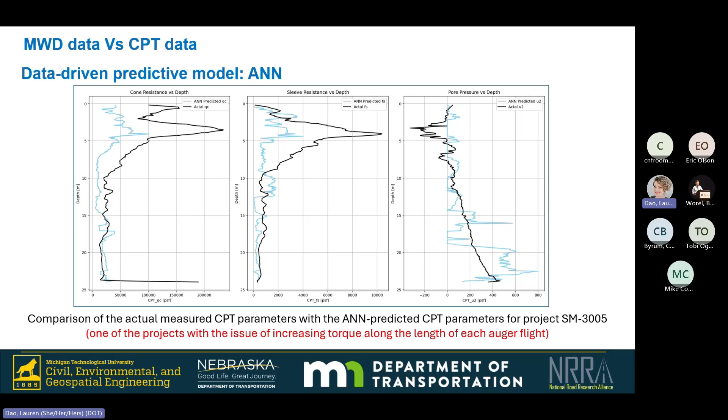So then also, as I mentioned, I use the CPT because from CPT you could classify the soil as well. I classified the soils from the CPT data, but on the same plot I developed these 4 regions.

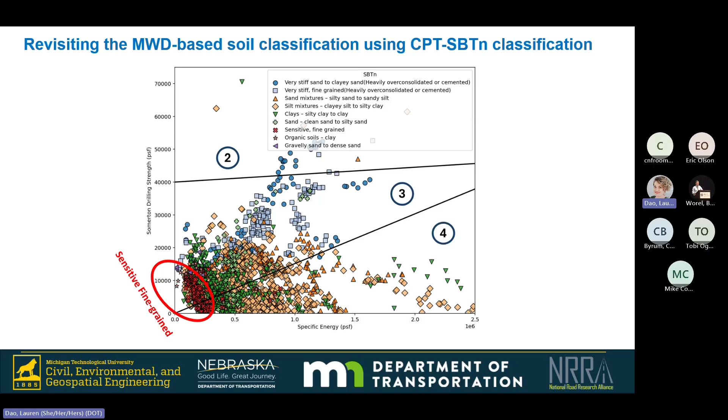Obviously it's zoomed in so I could look at it, and again there's a good correlation. There's a lot of scatter, but all of that scatter is explainable. The only thing I noticed is that little corner at the bottom of the plot, where all the soils classified as sensitive by CPT are clustered in the red crosses. So I added that one little section to my plot.

So this is one plot that I have for now. It's not perfect, but it could be used for soil classification based on measuring while drilling. I just want to emphasize that I don't like this corner, but I will work on that later on.

So again, another thing you could use measuring while drilling data for is to optimize your drilling process. That wasn't part of the scope of this project, but because of all the issues we saw with HSA, we decided to use that and optimize the HSA at least.

So we went on site, drilled 5 new boreholes, tested various differential penetration rates and rotation speeds, and plotted them against the specific energy, which represents how much energy you use to extract a volume of geomaterial. As you can see, if your penetration rate to rotation speed ratio is in this area, you have higher energy. As you enter this area, you have the minimum, and if you increase the ratio further, the energy starts to increase again.

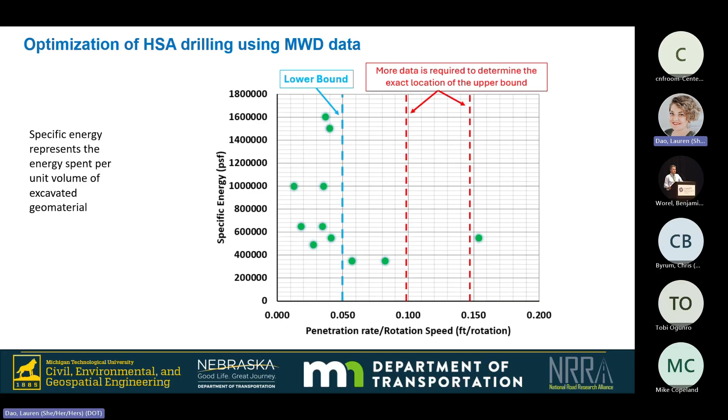We found the lower boundary to be about 0.05 foot per rotation. We didn't have enough data to find a clear upper bound, but conservatively it should be about 0.08, 0.09, up to 0.1 foot per rotation.

So the next thing we did was try to predict SPT N values from measuring while drilling data. One question arose because all of these tests, the measuring while drilling and the in situ tests, were done in the same borehole.

So when you do that, the problem is: if you did the SPT here, you drill up to this point, do the SPT test in situ, and this soil becomes highly disturbed, with a hole in the middle after the test. Then you take the sampler out and drill over it. So the measuring while drilling data collected over that area is from a disturbed section.

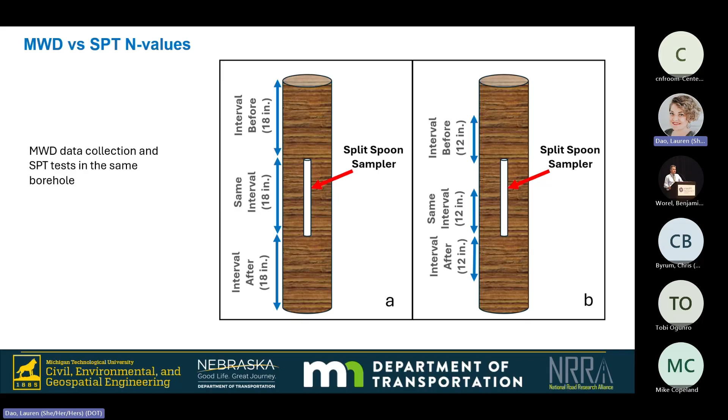We actually find out that despite the disturbance, if you use the 12 inch interval, it gives you the best results. We actually look at the measurement while drilling for the intervals before and after to see if that disturbance has some effect on the samples.

For pretty much all the soils, there's almost no effect except for clays. The clays do have some effect. The signatures are different from other areas, but clays in general have so much noise in them anyway. So overall, the best results are still from the same interval.

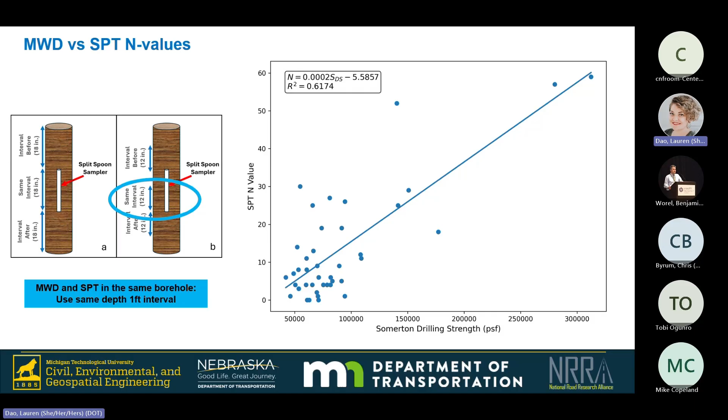But again, then I developed machine learning models for them. The neural networks use 9 input parameters this time, because Somerton parameters do not take these two into account. So we took them into account as well, and we separated above and below the groundwater, because that has effects on both SPT and measurement while drilling. The correlations look perfect when you do this, but it's actually not as perfect as you would think.

So then I had to develop a model and try to develop a continuous SPT value for each borehole. The red ones are the actual ones. The black one is with linear regression, simply one Somerton parameter correlation. The blue one is the artificial neural network, which had an R squared of 0.9.

So when it comes to higher SPTN values, actually measurement while drilling does a better job. For the lower ones, especially this story, I picked this borehole specifically because this is one of the worst comparisons between ANN and SPT N values. I picked this on purpose because it shows a very important flaw of machine learning models if you don't have enough data.

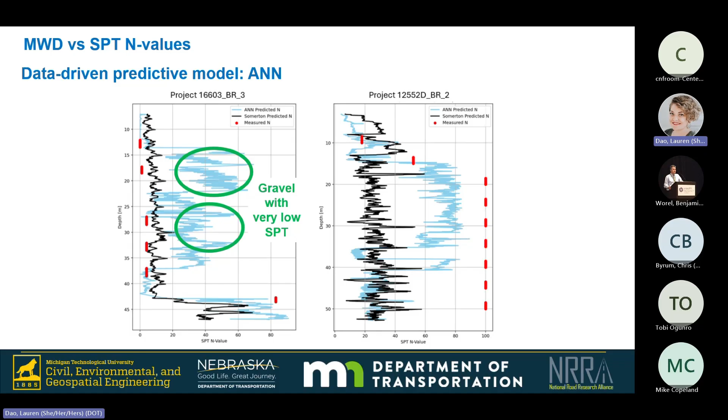Then we did the same thing for undrained shear strengths. One thing I have to emphasize here is we could measure undrained shear strength in two methods: unconfined compression strength or triaxial UU test.

We could not develop any correlations for unconfined compression strength testing, simply because those samples are collected from the field and tested, and the moisture content on those samples is so different. The range was from 20% to 89-90% moisture content. If you have the same soil with that range of moisture content, the strengths are going to be all over the place.

However, when you do UU, because it's a triaxial test, you actually saturate your sample first and then test it. Then your data becomes a lot more uniform, so you could develop a prediction for undrained shear strength under the UU test.

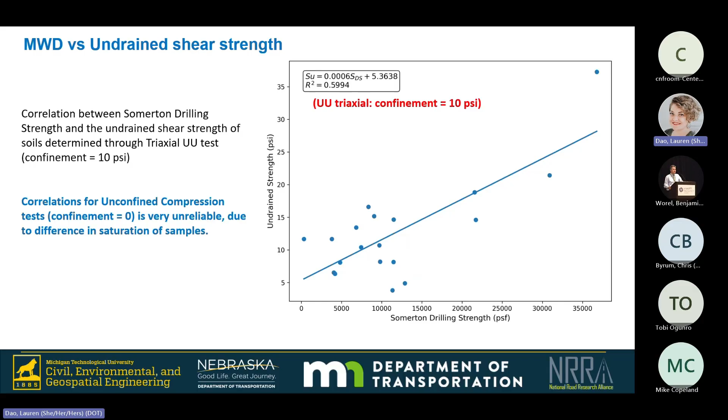Again, I did machine learning, it seems perfect, but this is the actual drawback of how it does not work. In this case, I took 20% of the samples out, the machine had not seen them. I trained the model, then gave it measurement while drilling data and asked it to predict, then plotted them. As you can see, R squared is 0.99.

It's almost perfect, right? But then again, I kept one bore log out and tried to estimate that with the trained model. As you can see, the model is simply memorizing where I have data. Everywhere else, it's just predicting a weighted average, okay?

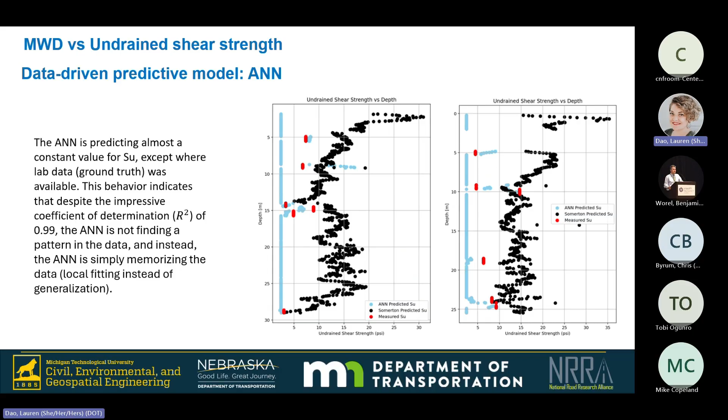I have a really good explanation why these machine learning models work for some cases, not for others, but we don't have time. If you want, I'd be more than happy to discuss this afterwards. I just wanted to emphasize that plots like this for measurement reliability with machine learning are not reliable. You have to always check, going deeper into your classifications.

And the last thing is UCS, we just didn't have enough data to predict the UCS of rocks. So that's all we have. Thank you.